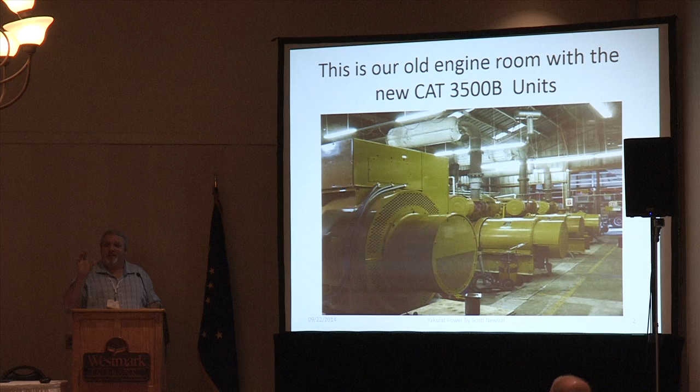As soon as we got them set up and started to run them, we had an inspection from the DEC and the EPA. They came through and read all the serial numbers, went through everything, because we were updating our air quality permit. So we had to change a lot of the lineup and the technicalities. They came in and actually went through each machine, read all the serial numbers, cross-checked them, etc. And they came back with a ruling that our new engine had been built 2 months too late.

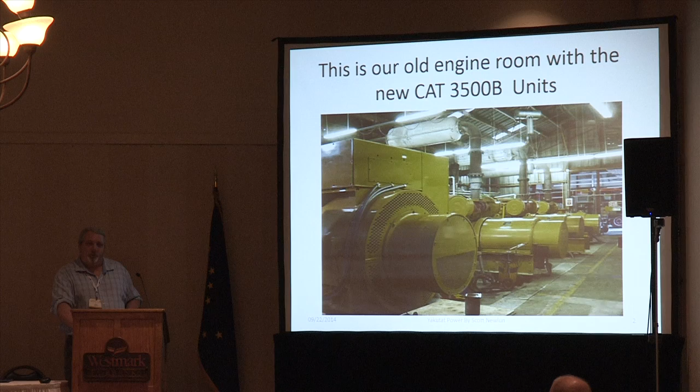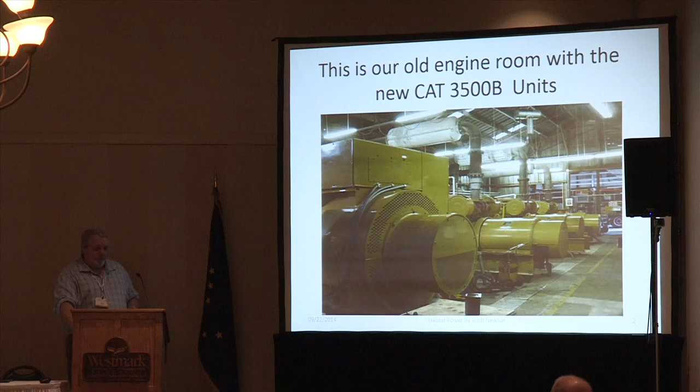We started the conversation of how we were going to get this thing permitted. We were ahead of the scheme, tried to get it manufactured on time, and now we were up against the issue that the law had changed, and it was our burden to prove that this machine had fallen into the RICE NESHAP air quality permitting. The process began, and this is a copy of the notice of violation for operating this engine.

The process began, and we started to contact the manufacturer, call the plant in Peoria, trying to come up with an idea of how we could prove that this machine was legal with the air quality scheme. So we could never do it. Caterpillar couldn't produce the born-on date for us, etc. So anyway, we kept operating the engine until we could come up with a resolution, and we were working with the DEC and the EPA all along this way.

They issued this notice of violation, and this was about a year later. We said, what do you want us to do to try to solve this? They gave us a couple of scenarios of what we could do. But in order to become compliant, we had to take a 10% fuel penalty, which put this engine out of the realm of operation for us.

It would cost us about $100,000 to $200,000 a year if we ran that engine with a different profile programming on it. So we kept running it for a while. Then we got this notice, and if you notice the second to last paragraph, it got pretty serious. And then we started really standing up and listening and trying to find a solution.

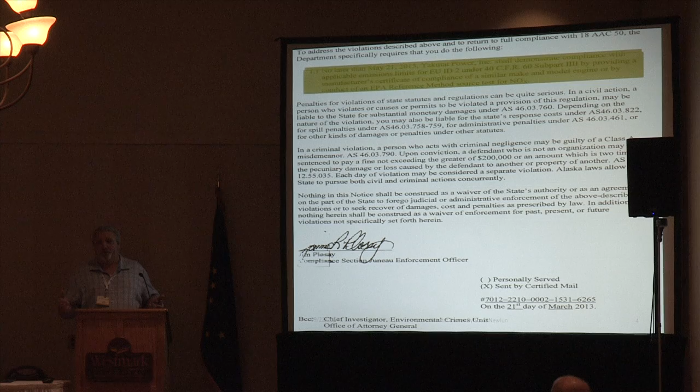One of the other issues was we could come in and do a full source test and prove that the pollutants weren't as bad as what they said they were. But when we researched that, it was $20,000 to $30,000 to mobilize a full source emissions test.

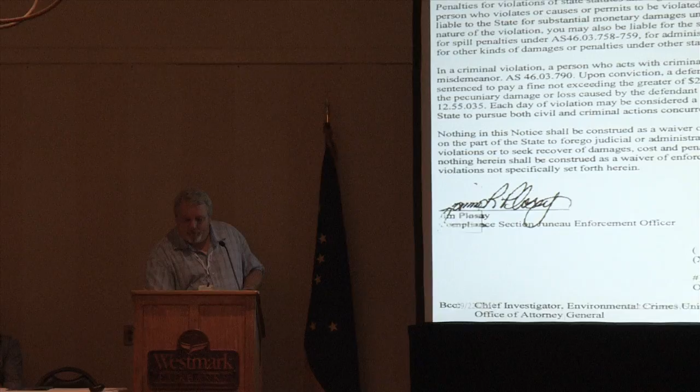So we argued with them a little bit, tried to come up with a solution that would let us keep that profile and the efficiency for the engine, because the community couldn't afford to pay that much for fuel. And then we ended up getting a compliance order by consent, which laid out what we had to do basically.

And if we had to operate that engine in an emergency, we could notify them and they would make a ruling on it. Well, that scenario happened a few months later, and we had to run that engine to keep the processing plants going, et cetera, because some of our other engines failed. So we ran it, documented it, contacted them, and we're waiting for the variance.

Never really heard anything back from them, so we shut it off, and we were still negotiating, trying to come up with a solution for it.

After several attempts working with these guys, trying to come up with a solution, the EPA and the DEC, we finally issued a case of why we thought we should be able to use it and what our plans were to fix the project. So basically, I'd offered up an opinion of what we could do. Send it to the EPA, DEC, let them look through it and come up with a ruling, say yes or no.

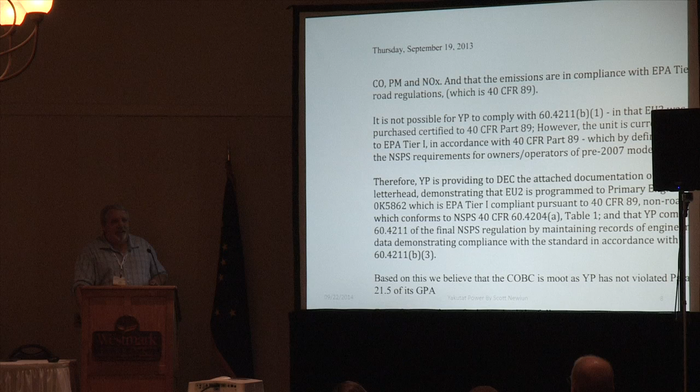And we ended up bringing in NC and reflashing the machine to a different program profile, taking the 10% fuel economy penalty, and that's how it is right now. So we did that, got all the certifications, all the technical paperwork ready for them, presented it to them, and they released the citation. So now we have a great emergency standby generator that's sitting there.

I mean, we can still run it. It's about a kilowatt hour per gallon less than our other units, but it's in our lineup for redundancy, so we have a safety factor in place. We're still trying to find out a solution to the problem. We're looking at dual fuel capabilities, maybe putting some natural gas in it and cleaning up the emissions, et cetera, and get our efficiencies back up.

But right now we have such a big investment in this engine, we have to keep it in the lineup, and we're in a little bit of a quagmire of what to do. You know, as we go down, if there's no solution, we'll have to replace that engine and that genset and try to come up with something that's as efficient as our other plants. But in this age of air quality regulations, it's hard to find that efficiency to meet the air quality that we have.

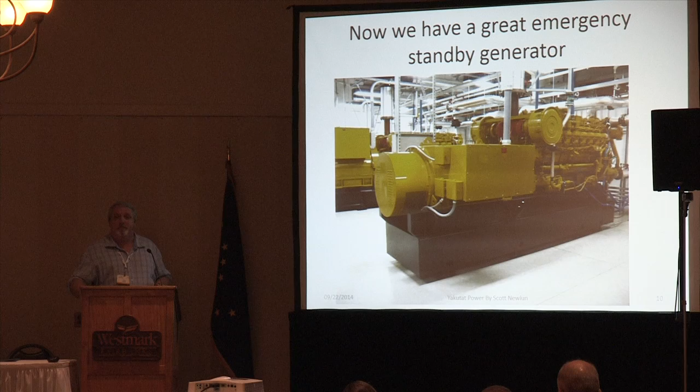And that's basically the end of my presentation, but I wanted to stress that, even in remote Alaska, and you think you're doing all the right things, and you go through the process, spend the time, do the diligence, things can happen. And there's regulations out there that can't be breached. I mean, the EPA and the DEC were great to work with. All the people there were great, helpful, didn't fine us, let us get away with more than most people would have. And they still had to follow the rules.

And that's where we ended up with it. And right now, we still have that engine in the lineup. We use it occasionally. And lesson learned. You know, that's what we thought, that we were ahead of everything, but some things slipped through the crack and we still got caught with it. And that's it. Any questions?

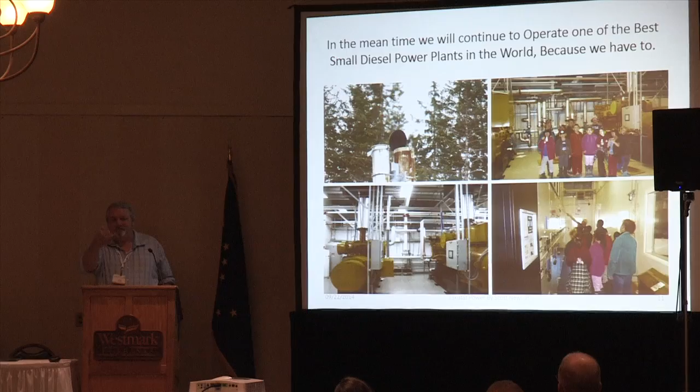And we're still looking at some other schemes. Like I said, the dual fuel, some of the additives still show some promise. There's some new technology that might come out in the exhaust streams that's not as cost intensive. And we'll retrofit if we can.

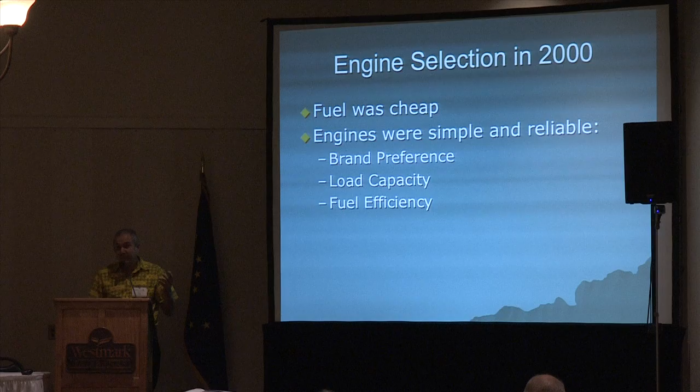Most of the people that are actually charged with enforcing these regulations understand parts of it, but not the whole of it, and it's very complex to try to understand it all. So it's a reality that we now live in. So, on that kind of sour story, I'm going to give us a happy moment and take us back maybe into the good old days. Around 2000, most of rural Alaska fuel was around $1 something a gallon. Fuel was pretty cheap. And diesel engines, by and large, are pretty simple and reliable.

And you had these foolish people that had a brand preference or whatever, but it was kind of a Ford-Chevy thing. Most diesel engines were basically the same, and they were pretty reliable. And it was very common for most of these engines to go up to close to 20,000 hours between major rebuilds without a whole lot of problems. A water pump would go bad, maybe a fuel pump, or change some injectors, but basically just very reliable.

And so in our role as consulting engineers, we'll work with different utilities and try to help them select the appropriate generation package. And a lot of times the top of everybody's list was brand specific. Maybe they just really had an affinity for a particular manufacturer. My grandfather ran Cat engines and I'm never going to do anything else, or whatever that preference was. But a lot of times it was the dealer and the support that they had. Their own mechanics were familiar with that particular engine and they just liked working on it. So that tended to be a real high priority.

And then load capacity, which was very often done in kind of a crude fashion. What's our peak load? Let's make sure we got the firm capacity to meet a peak load on a cold winter day. And then fuel efficiency was in there, but by and large, a lot of these engines were pretty similar, and there wasn't a huge variation.

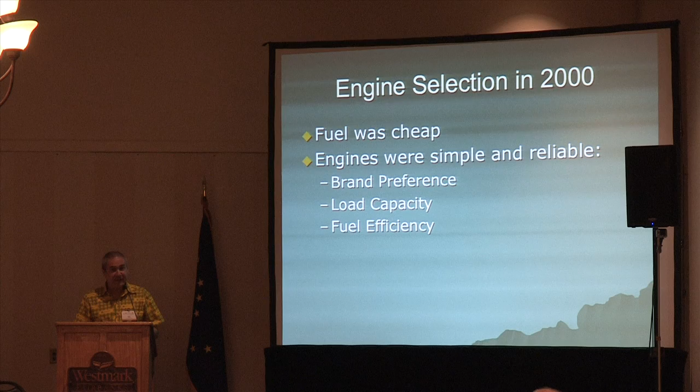And interestingly, that dynamic changed pretty quickly over a decade. So you go to 2006, and a lot of places were paying $3 a gallon, and within a short time, a lot were hitting $4 and higher. And so you triple the fuel prices, the dynamic changed. And the technology was changing.

Electronic fuel injection came out of the weird R&D stage into a common, taking over the market on newer design engines. And these offered these flatter fuel curves that you heard talk about, and higher efficiency, cleaner burning engines. Separately cooled aftercoolers, lowering that turbocharged boost temperature, helped reduce emissions, but it also got a lot more horsepower out of these engines. We'd see the same engine block that used to be rated 300 kW pushing 450 to 500, and some improved fuel efficiency. So there were some great benefits that came along.

Well, once fuel efficiency kind of hit the top, people started having less affinity for their particular favorite brand. If their favorite engine was getting 12 kilowatt hours per gallon, somebody made one that got 14 and a half at the same load, they started thinking, I want the fuel efficient engine.

And about that time, we started getting better with electronic controls. You know, early days we tried to do in the 90s some automatic demand control where you'd monitor the load and shift, and things were notoriously unreliable, and very often the operators ended up just putting it in manual and just picking a big engine and running an overcapacity engine all night because they weren't able to catch the load as it rose in the morning. But mid-2000s, we started getting some more sophisticated PLC-based controls that were actually very reliable, and a lot of people started going to better demand management.

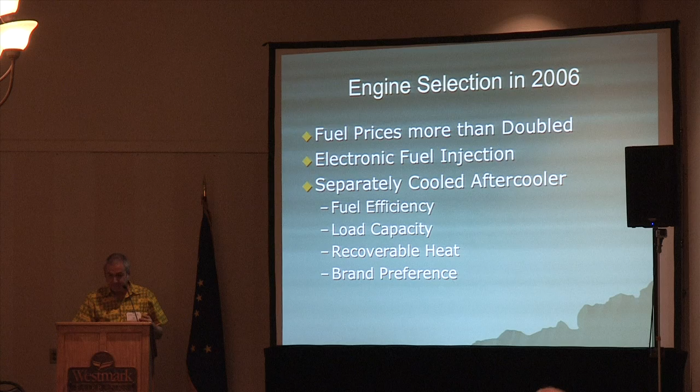Well, the other thing that happened is, you know, Steve and I started working on heat recovery back in 1990, and we just thought it was the greatest thing in the world. Reality is diesel heat recovery saves more fuel than all of our other highfalutin schemes if you actually look at the numbers. But it's not very sexy, and so sometimes we'd come to the energy conference, make a heat recovery presentation, and there'd be 7 people there kind of like, yeah, right, what's the deal? Don't we all do this?

But when fuel prices shot through the roof, suddenly the clinic that's paying $4 a gallon is a lot more interested in heat recovery, and so is the school district, and so is the water and the sanitation facilities, and so recovered heat became a big deal. But guess what? These new fuel-efficient engines, especially the ones with separately cooled aftercoolers, they don't produce as much heat. In some cases, you lost a third or more of the recoverable heat. So now when you're looking at engine selection, you're thinking about fuel efficiency for producing generation, but also heat rates and how much heat can you get.

And sometimes maybe using a marine engine that's 1 or 2% less fuel efficient on the electrical side, but it produces 40% more heat, in the big picture is a better solution for the community. We're saving more fuel. So it became a little bit more complicated, and the bottom line is we had to start looking at these engine selections from a lot more angles.

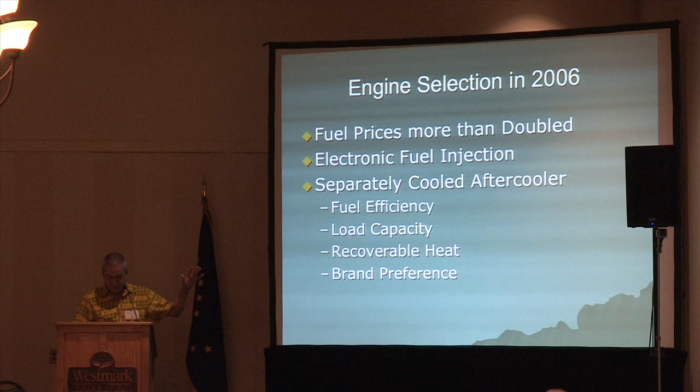They were very sold on Caterpillar, and nobody gave me a Cat shirt, so I can't promote that brand today.

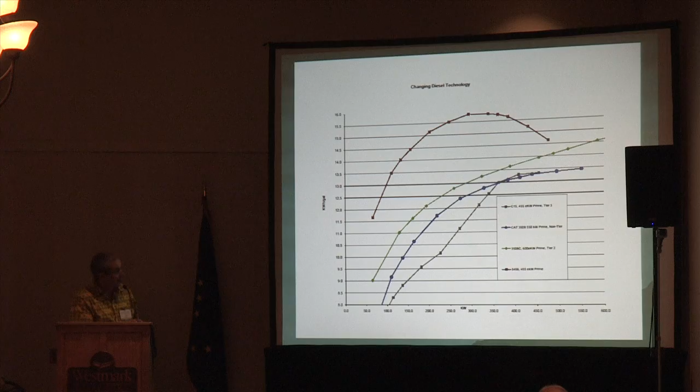But if you run these numbers down, here's what happens over the course of the year. It boils down to 40,000 gallons a year in fuel savings running the more fuel efficient engine. This is for one utility, their prime mover. And at that time, they were paying about $4 a gallon. So it's $160,000 a year. That engine pays for itself in a year. You buy the engine, you pay the mechanic to install it, even a little bit of engineering, you paid for that engine in 1 year.

So even if the engine had some reliability issues, you could darn near pay a mechanic to sit in a chair beside the thing and wipe it with a washcloth every half hour if you needed. I mean, it's like whatever. The fuel cost is so significant that you just can't ignore it.

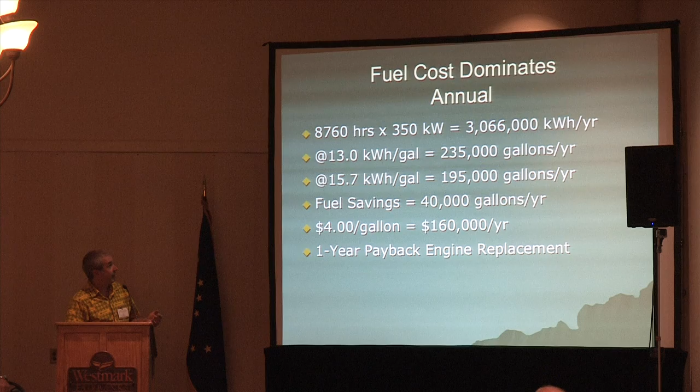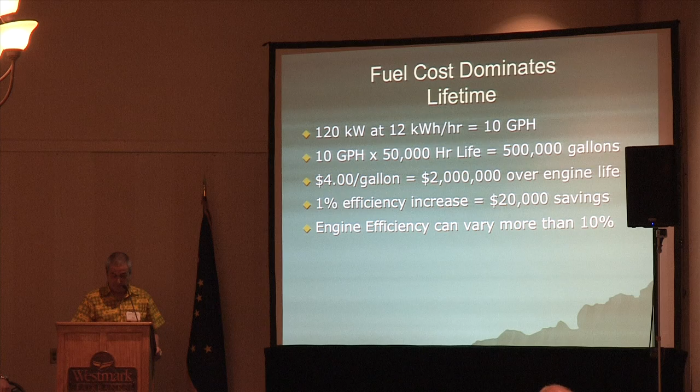Now, here we are, 2014, and these are not the good old days. Things are messy. And when we went to Tier 3 engines, the whole game changed. They started putting on all kinds of things to meet the interim regulations: variable vane turbochargers, exhaust gas recirculation, and these things are junk. They are notoriously problematic. You take an engine that under a Tier 1 or a Tier 2 configuration might go 20,000 hours with minor repair, and it's failing every 4,000 to 5,000 hours.

And it's not stuff that your local mechanic can just wrench some parts on. It's stuff that a trained mechanic has to come in with the right software to key in the right codes, to sync up the new replacement piece of equipment to the old one, to troubleshoot all the errors. And suddenly the whole universe changed on reliability.

Well, now I come back to something that I took for granted. It's very important that we keep the lights on in rural Alaska 24 hours a day. And when is something like this going to fail? When it's 50 below and nobody wants to fly a plane and no mechanic wants to come in dragging his tools through a dark village with no heat. So reliability is now up there, but we can't say I want a reliable engine and I'm just going to ignore EPA, because you might be the next person getting a $200,000 fine.

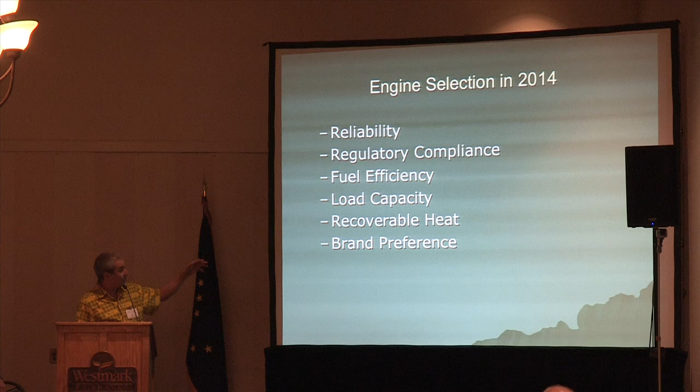Other things, fuel efficiency, load capacity, heat recovery, all those are factors. But now we're faced with reliability and fuel efficiency at the absolute top of our list. So Steve is going to talk about the regulatory compliance issue, and then we're going to land on some options that we do have, because we've taken the time to look through all the different facets of the regulation and find some solutions that do work for rural Alaska and enable us to have a reliable engine. But let me just say, there was a great question for Scott.

Well, couldn't you go to higher fuel efficiency and then add exhaust after-treatment? But a lot of that exhaust after-treatment for diesels is in the infantile stage right now, and it's pretty crude. It's not really designed for part load operation, which is how we run our diesel engines—we rate them for one thing, but run them at 50% or lower load a lot of the time.

The exhaust stream is cool, so most of these schemes actually require you to burn additional diesel fuel to get the temperature up in the exhaust after-treatment to make it function. This stuff isn't really proven in part load prime power applications yet, but I think 10% could be a minimal penalty you pay to burn extra diesel fuel to keep the exhaust treatment working like it's supposed to.

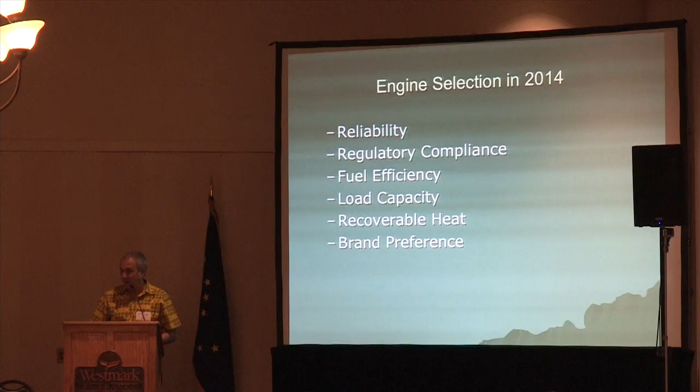So the current technology with exhaust after-treatment is, in our opinion, a pretty bad option for prime power in rural Alaska, and Steve's going to take it from there. Oh, I guess maybe before he gets into the regulations. Sorry, I tried to skate on that one.

Any questions? Yes. Can you go back to that little calculation? Yeah, I'm looking at Kubota.

Yes. I think your mic's on, if you could, so everybody else can hear. It might not be. Oh, yes, okay.

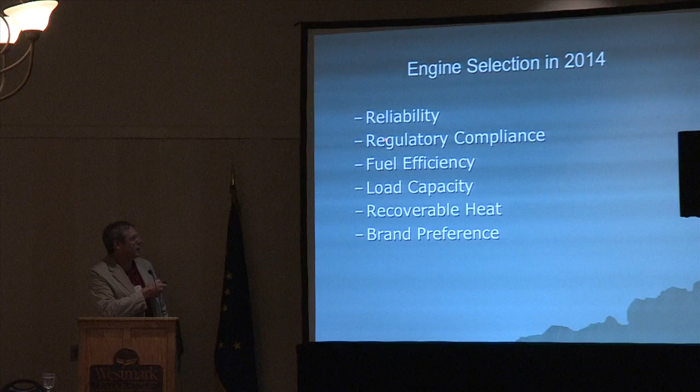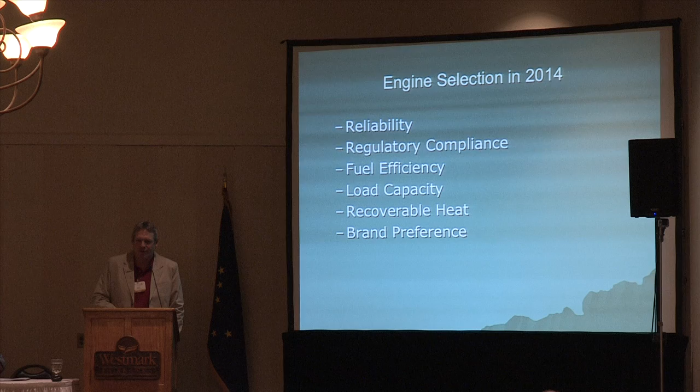Pretty much the most important things involved with engine selection come down to reliability, fuel efficiency, and of course regulatory compliance. If you don't have a compliant engine, it shouldn't be in operation. Based on Scott's story, I think you can agree it's not a good place to find yourself.

This is kind of indicative of what diesel engines looked like prior to Tier 3. Non-tiered, Tier 1, Tier 2 engines were relatively simple. It was pretty much a diesel engine with a turbocharger and an exhaust system up above. Very reliable, low maintenance, and relatively inexpensive to operate.

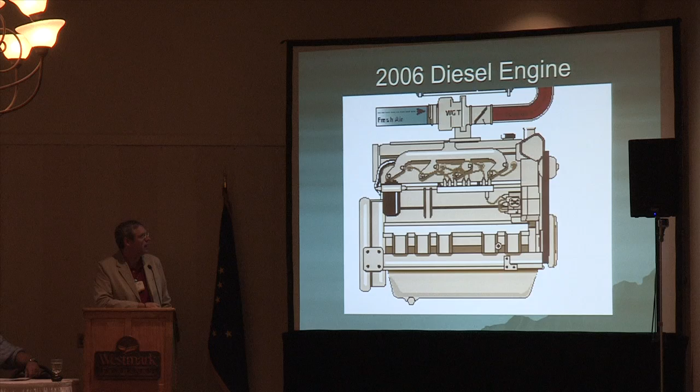So an awful lot is in a final Tier 4 engine, and by and large, any diesel engine in operation on the road system or a piece of heavy equipment installed in 2014, 2015, and after - well, let me throw in a caveat here: for almost everything I say, there's going to be at least one exception to the rule, so I have to be somewhat generic. But by and large, after 2014 going into 2015, any diesel engine on the road or in an off-road piece of equipment has all of this type of equipment involved in it.

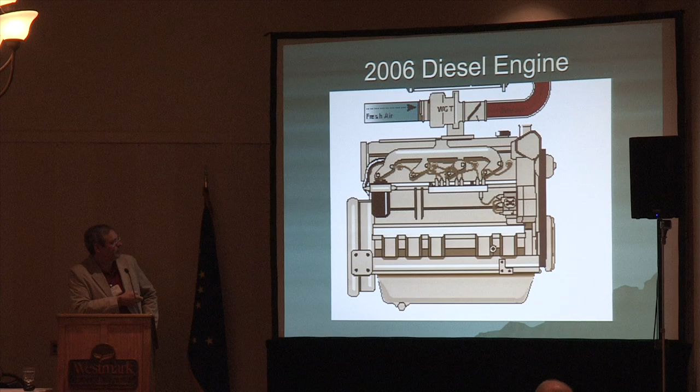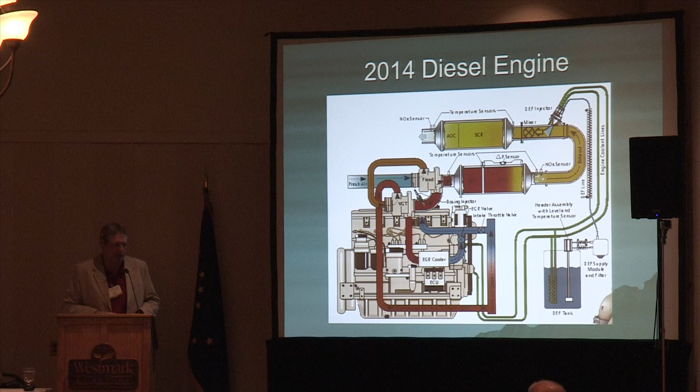The second point is that as engines went from this style to this level of complexity, reliability changed. The engines used by and large in rural power plants are industrial engines, or they come from on-road trucks and semis, or some of the larger ones from off-road equipment like excavators and dozers. This is where the technology comes from that's used in a power plant in rural Alaska today.

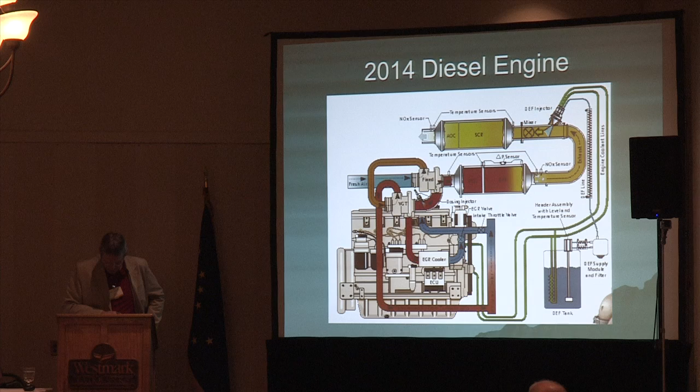What I have here is an example, and it's kind of old data, dating back to 2006. But I think it's still pretty current today. In rural Alaska, out of all 140 rural Alaska communities, there's roughly 30 million gallons of diesel fuel used in comparison.

30 million gallons is used for power generation. In 2006, roughly 30 million gallons of diesel fuel was used in PCE communities. The largest 5 hubs, which usually are Title V and have the higher air quality emissions regulations, used pretty close to half of it. So that means there's roughly 15 million gallons of diesel fuel being used in 140 power plants around rural Alaska, and there's not a very large density of fuel-burning diesels in those communities across a large geographic area.

In comparison, all of rural Alaska between power generation and the roughly 30 million gallons of fuel used for heating and a little bit for off-road equipment like dozers and graders, is a very small fraction of the 565 million gallons of fuel used in the state of Alaska.

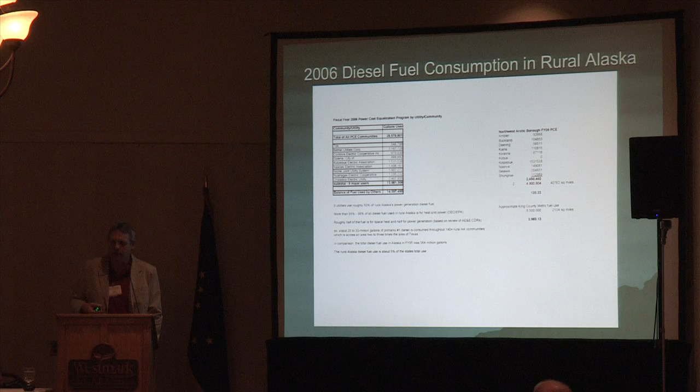So the point is that it's important to have a pretty clean diesel running engine, but there are so few diesels operating in rural communities that they don't necessarily need to be as clean as what we're seeing here.

The purpose of these final Tier 4 requirements is that in the continental U.S. and other places like Canada, Europe, and even here in Anchorage, there are tens of thousands, hundreds of thousands, millions of operating diesel engines. So it's really important to have a really clean engine because there are so many of them. In rural Alaska, in many communities the only diesel engine running is the power plant, unless somebody's clearing snow off the airstrip. So it's a very low density.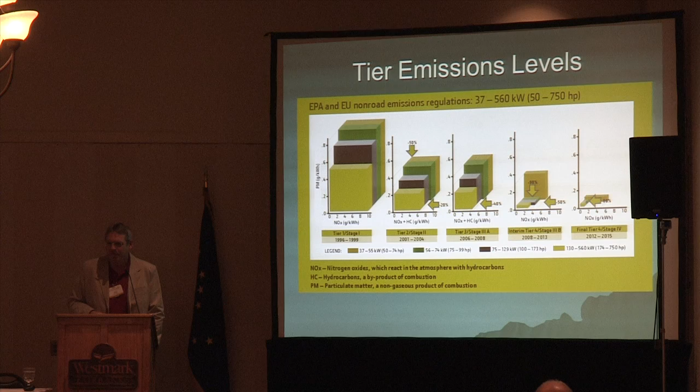Just for comparison, I looked this up today. In 2012, according to the EPA, 60 billion gallons of diesel fuel were consumed in the U.S. for everything, and of that, 36 billion gallons was for on-highway trucks, a little more than half. Again, the technology I showed in that 2014 final Tier 4 engine needs to be so clean because 36 billion gallons of fuel are going through them, so it needs to be a very low emitting engine to keep pollution down.

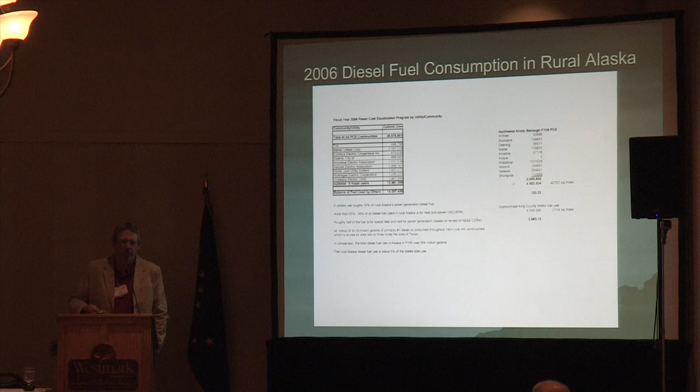You can see it's a huge reduction in particulate matter emissions, which is a good thing. But the engines in use in rural Alaska, the larger Cats, are relatively low-emitting particulate matter engines. The reason this occurs, I think Scott had mentioned the term low BSFC, brake-specific fuel consumption.

In simple terms, when an engine is tuned to maximize fuel economy, that's called a low BSFC configuration. Because the fuel is burnt efficiently and gets the most energy out of it, it inherently puts out the least amount of particulate matter, without having all the exhaust equipment I showed you on the Tier 4 engine.

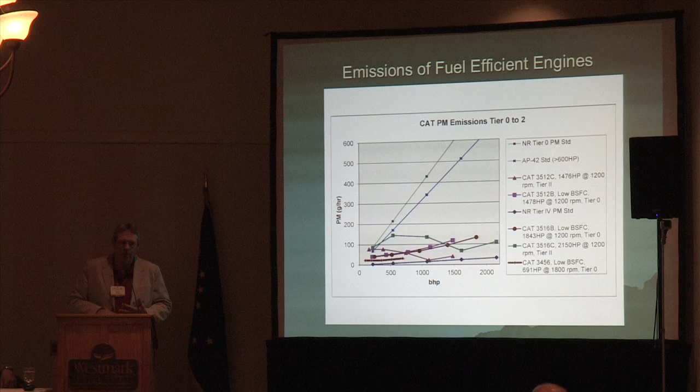All right, so now I'm going to talk just for a moment about the different rules. Some people had asked about the status of the emission rules in Alaska. Fortunately, now that we're in year 2014 on the way to 2015, things are becoming a little more steady state. Over the last 4 or 5 years they were constantly changing, but things have somewhat leveled out.

In very general terms, there are two different emissions rules. One is called Rice-Neshap. It applies to engines that are April 1, 2006 and older. If engines are newer than April 1, 2006 - which Scott ordered one prior to that date but got it after - it falls under the New Source Performance Standards requirements. The key difference is that under NSPS, the burden of emissions compliance goes to the manufacturer.

A couple things came out of that. One is you can see all the equipment that went onto the engines - oxidation catalysts, particulate filters, SCR, diesel exhaust fluid, a fair amount of complexity. But they're what's classified as a controlled emissions solution. So the onboard engine is not only controlling the diesel engine, the firing of the fuel, the timing of the engine, all those things, but it's also monitoring all the other parameters - the temperatures, the pressures, the particulate matter, everything - and it's constantly changing in order to optimize the fuel economy and stay within the emissions requirements set by the EPA.

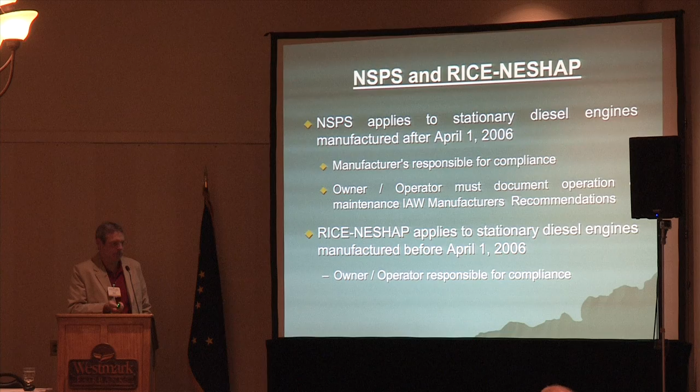When this rule first came out, I think in 2010, there was quite a bit of burden placed on all operators of Rice-Neshap engines, continental U.S. and in Alaska. And the state of Alaska submitted what was called an alternative implementation plan to the EPA.

A lot of things came out of or were involved in doing that. But the bottom line was that for an engine which is Rice-Neshap, older than April 1, 2006, in order to be compliant with the EPA's requirements, it's fairly simple. You need to change the oil every 1,000 operating hours, and for the bigger engines, that's about 200 gallons - which is a lot. At $6 or $8 a gallon, you're talking pretty significant dollars to change out that oil.

$20 a gallon, 200 gallons - that's $4,000 for an oil change. It's pretty expensive to change your oil every 1,000 hours. If you operate the unit continuously, that's 8 times a year, so that's $32,000.

The EPA recognized there is another way of determining if the oil can continue beyond that. They allow an oil analysis plan, probably not done too frequently by smaller utilities with smaller engines and lube capacities, but they do provide that caveat.

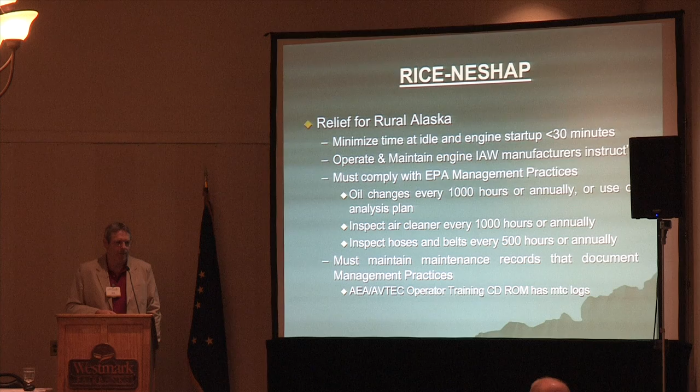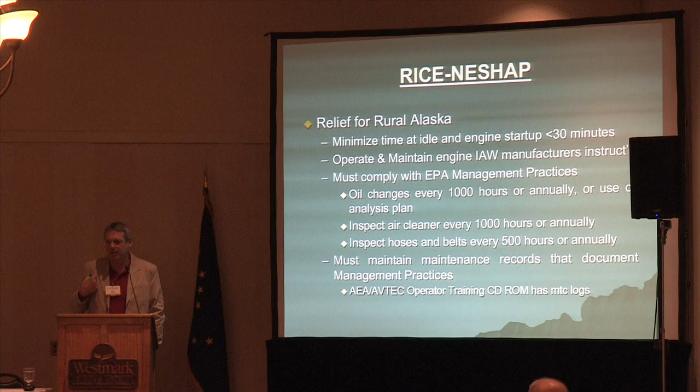By and large, in my limited personal experience, when an EPA person shows up to look at something, if you can show them the correct documentation and they look at it, they're satisfied. If it doesn't answer what they're looking for, it raises red flags, and they go back to the office and start sending letters, and it's a lot of work.

So under New Source Performance Standards, again these are engines from April 1, 2006 and later - they're the tiered engines by and large.

Similar to RICE-NESHAP, the EPA recognized Alaska is a little different, and it doesn't make sense to put the same burden on rural communities as it does in the continental U.S. I think the primary reason is that if you don't have a lot of emissions emitters, meaning not very many diesel engines, you don't need quite as strict a requirement. Plus the cost of maintenance is just astronomical.

What came out of the New Source Performance Standards and the state of Alaska's involvement is that the EPA eliminated - as I said earlier, they acknowledged that NOx is not a criteria pollutant of concern. That's a pretty big thing, getting the EPA to acknowledge they're not concerned about a pollutant. But they limited it to rural Alaska.

So they said you don't need to use SCR - selective catalytic reduction. It reduces NOx, and the way it's accomplished is you inject diesel exhaust fluid into the exhaust system, and it consumes it and oxidizes it and changes it into nitrogen and water, I guess.

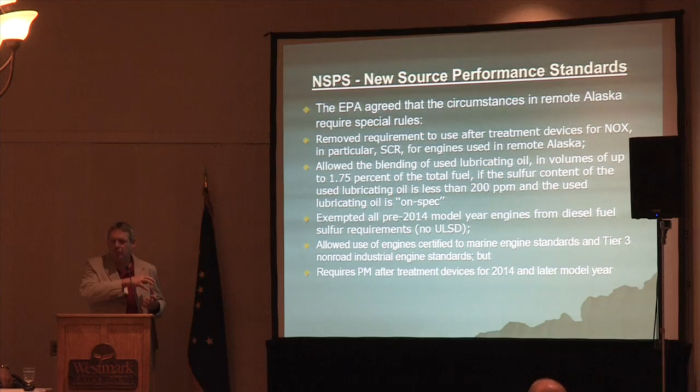That's a nice thing, but there are no Tier 4 engines that can be purchased on the market where the manufacturer will allow you to remove that component. The reason is they're on the hook for meeting the emissions requirements. They spent many millions of dollars to come up with the technology, test it, and get it approved. And the market of Alaska, for the number of diesel engines used in the 140 communities - no way.

So what happened is by not requiring SCR, that means a final Tier 4 engine, by and large, cannot be used in rural Alaska because there isn't the infrastructure for it. There's no urea, no diesel exhaust fluid, not the infrastructure for moving it. So there were some unintended consequences that came out of that.

The other thing they did, which is really good and specific to rural Alaska - doesn't exist anywhere else in the United States - they allow the blending of used oil. That's really important because used oil, if it doesn't get burnt in the engine, generally gets dumped on the ground somewhere. So it reduces pollution of the environment, and there's a lot of BTUs in the oil, and it displaces the diesel fuel, so it's a very positive thing.

The other thing they did was exempt the pre-2014 model year, which is where we are right now. We're now in 2014 model year engines and probably very close to 2015. They said you don't need to use ULSD in those.

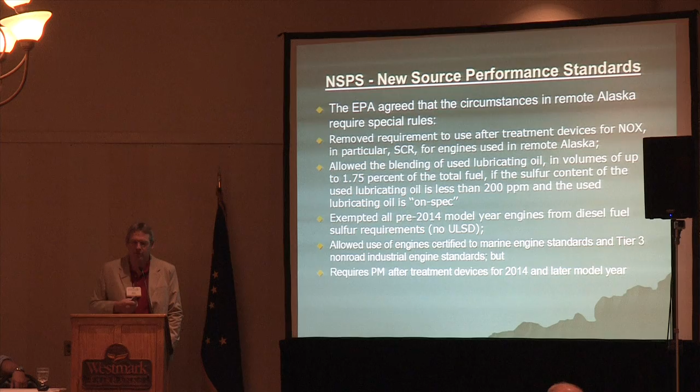So, regarding the Tier 3 non-road industrial engine, this is what the EPA decided would be the standard for rural Alaska, because Tier 4 engines won't work. There is no diesel exhaust fluid. And a Tier 3 engine up until 2 years ago was the prime mover and what was being sold for off-highway and on-road equipment. And so it was very fuel efficient, but it had all the bells and whistles that we don't like, variable geometry turbochargers, exhaust gas recirculation, and other things that haven't proved to be very reliable or effective in bush Alaska.

So as of this model year and in the future, final Tier 4 engines are the only thing that can be used for mobile equipment anywhere in the United States, and Tier 3 engines now have been relegated for emergency or backup power. An emergency diesel, like in a building like this or in downtown Anchorage or anywhere else, may operate a few hours a year. So fuel economy, nobody cares. And in the market of the Tier 3 engines now, because nobody's driving them on the highways and fuel economy isn't important, it's how cheap can you sell the thing in order to get it into the building.

Well, the fuel economy of these Tier 3 engines that are now classified as non-road industrial but are really emergency or backup, that's their purpose and their market, the fuel economy is horrendous. And so the examples that Brian showed you, it's even worse. So a Tier 3 engine is no longer a viable solution for rural Alaska. Whoops, plus I had one other thing there.

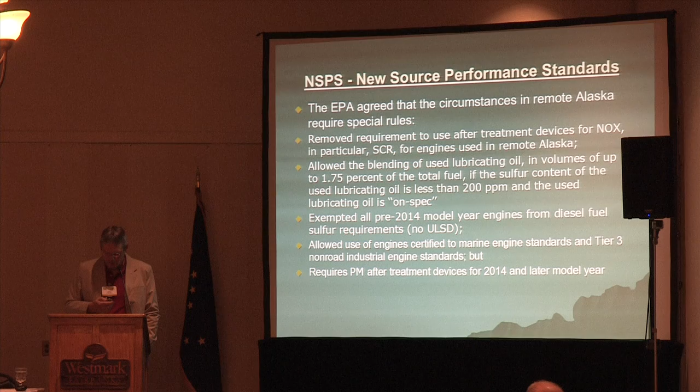Right now, if you use either a 2014 marine engine or a Tier 3 2014 engine, it requires an after-treatment particulate filter. It's a third-party solution which requires engineering and design. And although they've been used on vehicles and buses and whatnot, there is no proven track record of reliability for use in an Arctic environment such as rural Alaska.

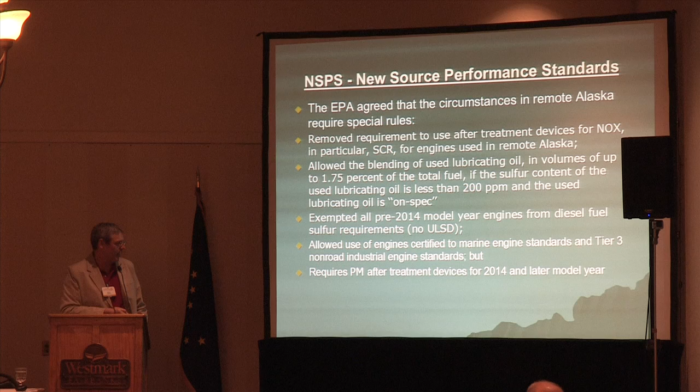So what are the options? You can purchase a 2014 final Tier 4 engine, but if you're in rural Alaska, I don't know how the heck you're going to operate it because you don't have the diesel exhaust fluid available to make it run, and the cost of maintaining it is going to be an extreme burden to the utility. You can purchase the Tier 3 industrial engines that I mentioned, but then again, you have to put a particulate filter into it.

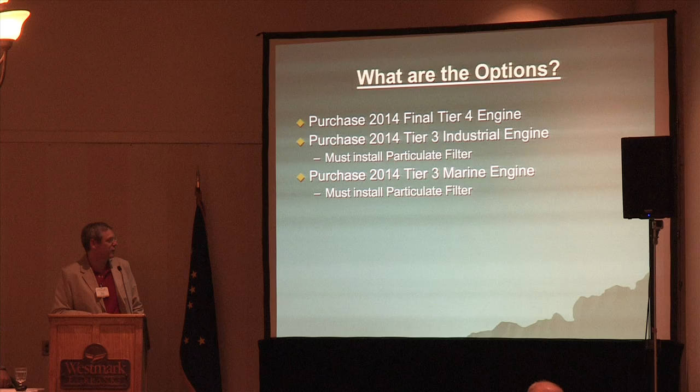You can do the same thing with the 2014 Tier 3 marine engines, but also as of this year and in the future, you need to do the particulate filter. And again, the issues with the filters, which I kind of hit on, is that they're not OEM, they're not equipment that's provided by the original equipment manufacturer. It's not a designed and controlled and integrated system. It's something that's put on aftermarket.

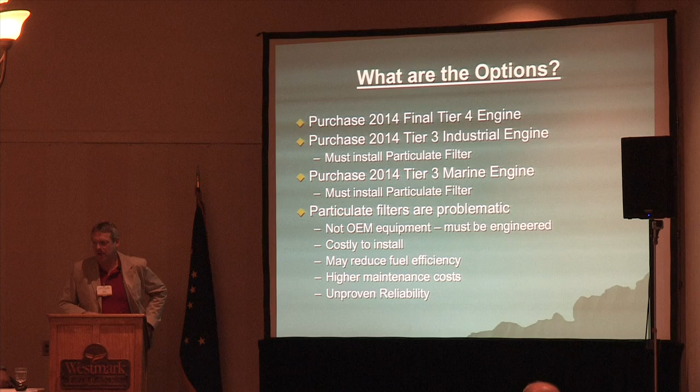And there's a lot of manufacturers that do this, and the main market is somewhere in the continental United States, not in rural Alaska. They're fairly expensive. They add cost. They do not improve fuel efficiency. There's more maintenance, and we're uncertain of the reliability.

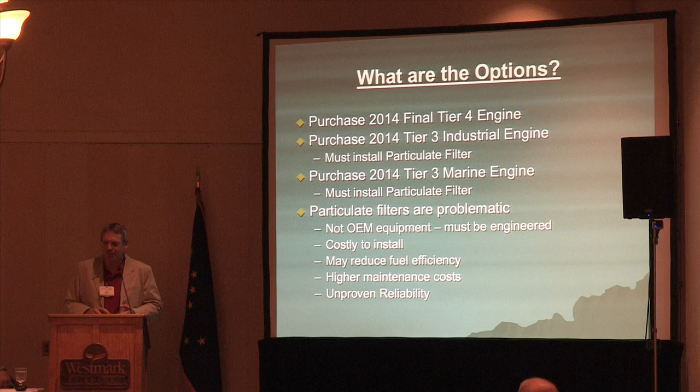I recently, talking to a particulate filter manufacturer, asked him three questions. I said, does your filter improve fuel economy? The answer was no. Does it improve the operation of the equipment? The answer was no. And does it improve or decrease maintenance requirements? And the answer was no. And my question was, well, why would we consider putting it on an engine in rural Alaska? We want it to be reliable, we want it to be fuel efficient, and it needs to meet the emissions regulations. So, a solution.

The Alaska Energy Authority, Gray Stassel Engineering, and other firms have been using what we call used inventory. Aged inventory, I think, is what somebody once called it. It's stuff that's been around for a while and is either used for a little bit or hasn't yet gone out, but it's an older piece of equipment. Pretty much, we've used all those up. We can't find them anymore. So if you can find one, you could use a brand new 2013 engine, prior to 2014, anything older that's brand new, but they're hard to come by, and it would meet the emissions requirements.

You can use low-hour used or rebuilt engines. We've done a lot of that. Some of the Series 60 engines, the Cat 3456 is something that we use a lot of because they're very low particulate matter emissions, exceedingly good fuel economy, reliability. There have been issues that we're continually addressing. Or you can use remanufactured engines.

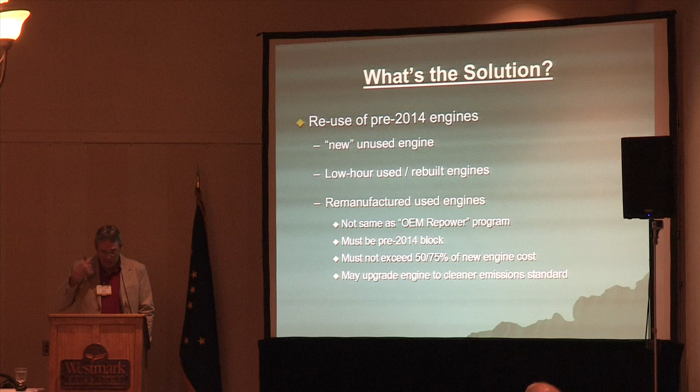And it was only about six months ago, I think, that we really started to realize what a remanufactured engine was and how it could provide at least a near-term solution for engines for rural Alaska. The issue here is, again, the new 2014 engines are all equipped with all of that stuff on the exhaust. And there's no way of removing some component of it, and they just won't work in rural Alaska for the reasons that we discussed here.

And so, what do people do when all the relatively unused or new unused engines are gone, and you don't want to rebuild an engine? Well, the option is to do a remanufactured engine. And this little note here, we just throw it out there: it's not the same as an OEM repower program.

What that means is if a utility were to call up a local vendor and say, I want to get a remanufactured engine, well, probably 95% of the engines that they deal with are for mobile sources. And unless the person you talk to really understands the requirements for stationary sources and the regulatory relief specific to rural Alaska, it's not unlikely that they're going to say, oh, we can give you an OEM repower, and that is only allowable for mobile source engines.

And it's really pretty cool. The EPA realized that there's a lot of stuff out there that people need an engine to make work, and all that exhaust emissions equipment won't fit in the truck. And so there's a limited number of engines that the manufacturers can literally take with a brand new block and make a brand new engine, but certify it to an older emissions limit. Okay, that's called an OEM repower.

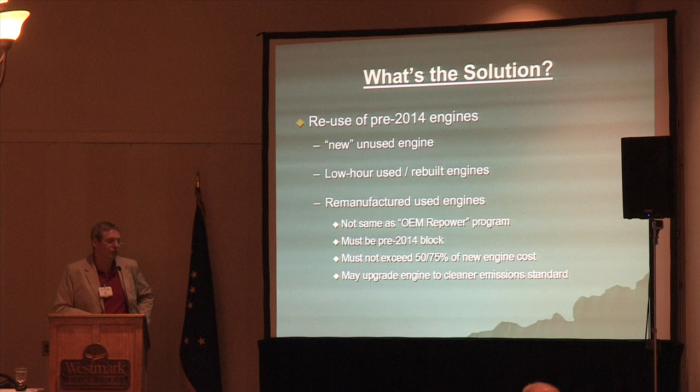So what's next? The Energy Authority is in the process of writing up some guidelines of how to weed your way through these requirements to make sure that when an engine is being ordered, it meets the requirements. The state of Alaska, from my understanding, both the Energy Authority and DEC, are continuing to work with the EPA to try and find additional regulatory relief for rural areas of Alaska. So that's it. Any questions?

All right. Yes? Mark Hoffman with Power. It would seem to me that our premise has been the best way to get more out of a diesel engine is to run it differently than what has happened for the last 60 or 80 years in primary power, which is allow the engine to run through its full RPM range. That's what makes it more efficient. The problem with primary power, when you're stuck at 1800 or 1200 RPM, you're not able to take advantage of the full fuel efficiency map of the engine.

So when we do that, as an example, we average about 211 grams per kilowatt hour, and even at 10% load get only as high as 250, and at 20% we're about 230. We're familiar with the challenges of Alaska. I think they're very serious ones. We understand the issues. But as a technology company trying to create a product that can help Alaska, what we end up competing with is this remanufacture strategy, because we can in fact beat the fuel consumption of any fixed-speed engine ever built, and we can meet all of the latest emissions requirements, but obviously the cost of goods up front is always going to be higher than if somebody wants to keep remanufacturing whatever engine block they can find.

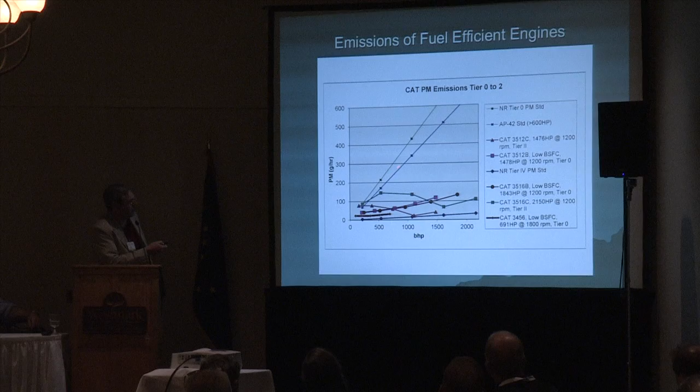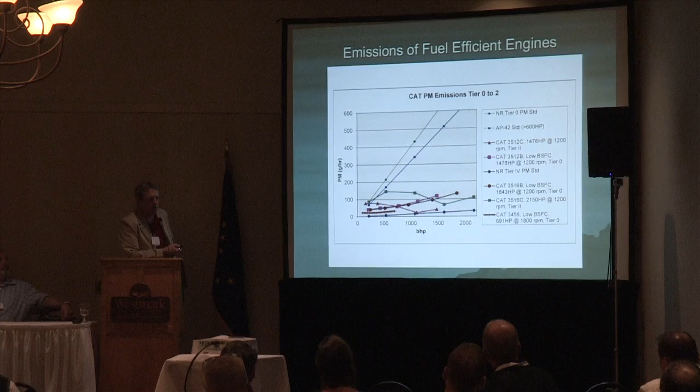Yeah, the reason for this is that when the EPA started out with rules, they had to start with something, and of course they took the dirtiest engines. But when you go from tier 0 to tier 2, that's pretty much 2000 to 2006. That was when high-pressure rail systems, electronic fuel injection, and variable timing all came out, which is pretty doggone good—hundreds of millions of hours of proven performance. And they're tuned for the best fuel efficiency, which gives low particulate emissions.

Absolutely. So again, compared to the rest of the world, that has got to be better than everybody else. Or if you go back to our original engine—oh, absolutely, I mean, is Cat and John Deere selling those original engines all across the world? They're still making them, right?

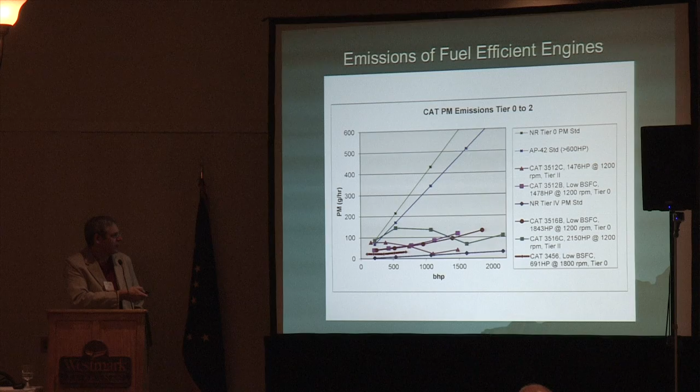Europe standards are very comparable to the United States—Canada, Europe, and the U.S. are very comparable. I know very little about Marine, but the Marine standards, they aren't quite as tight. Guess I got to point to the right thing—I mean, the Marine standards are somewhere in this range here, but those Marine standards are worldwide as well.

So by and large, there are roughly 60 billion gallons of diesel fuel used in the U.S., and roughly 60% of that is in on-highway rigs. So it's pretty doggone important to make them clean. But yeah, lots of places—Mexico and third world countries—that's where the engines that can't be sold in rural Alaska end up going, because they have less strict emissions requirements.

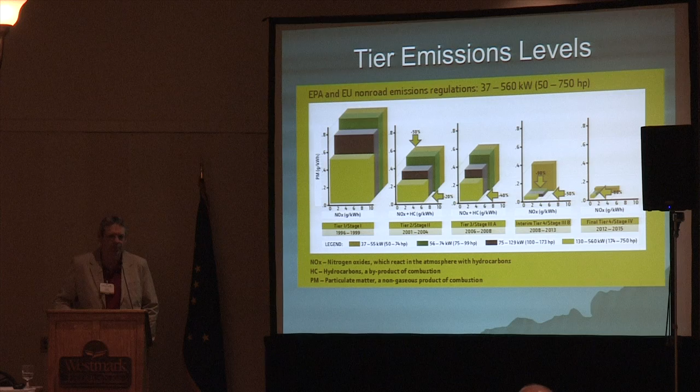Any other questions? It's almost lunchtime. It is lunchtime. Thanks. That's it.